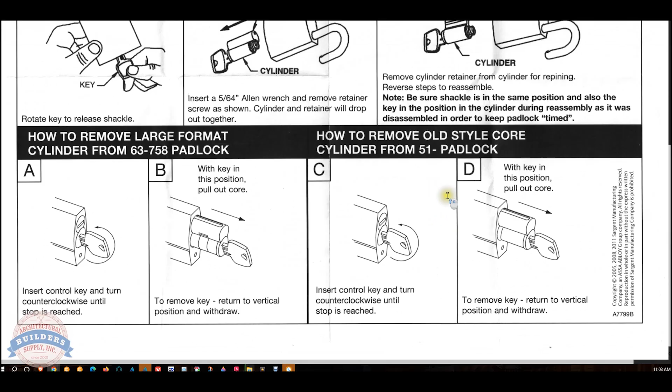The point of me saying all of this is in the back of the body of this lock shipped to me from Spain is a drilled and tapped hole for a screw that holds it in. So that's how you'll be able to service the cylinder, and at that point it'll come out. These obviously take the large format standard Sargent cores.

If you have an interchangeable core version, which obviously this is what we're dealing with, when you look at the 63 option, you'll use the control key to remove that. Fun fact, the Sargent interchangeable core cylinders, the control key rotates counterclockwise. Most rotate clockwise in my experience. Key pull position when you've got that rotated about 10 degrees counterclockwise.

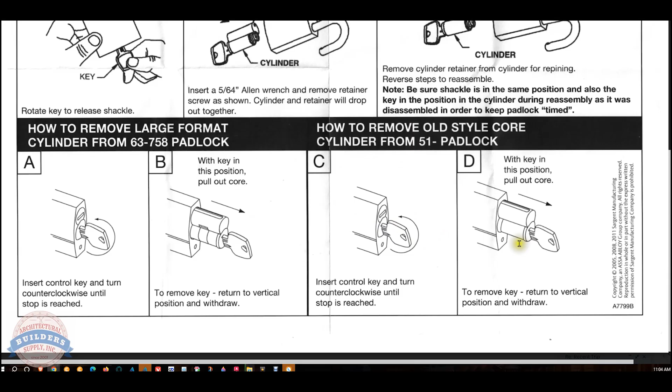The 51, how to remove old style? Yeah, sure. So I don't. Maybe in the 1980s is when they switched from the old to the new style Sargent cores. I would imagine there must be a mountain's worth of the old style still out there, given the fact that Sargent's been in business since the 19th century. I'm not sure what decade in the 19th century, but Civil War era, if not before. So that's the instructions. Let's take a look at the cut sheet.

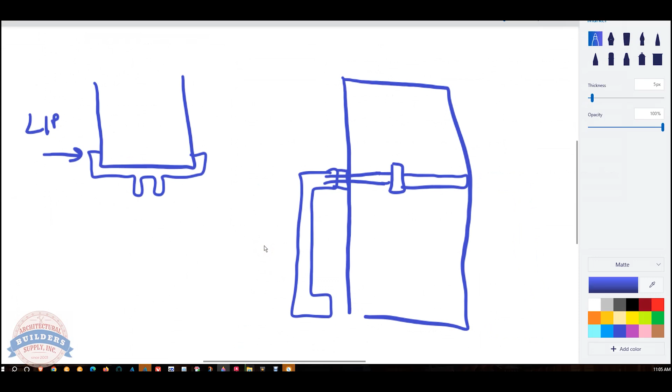I'm not a padlock expert, but I guess it would be true to say I know a little bit more about it. Here's the body, and here's the shackle. So literally in here is a ball bearing, and there's going to be a spring in here. And what happens is when you rotate the cylinder, I do believe there's a spring inside of there.

I think I'd have to pull up a parts drawing, but what happens is when you turn the key and rotate the cam on the back, it's probably not a spring. It's probably a piece of metal that deflects or something that moves out of the way, where the ball bearings literally come out of the way.

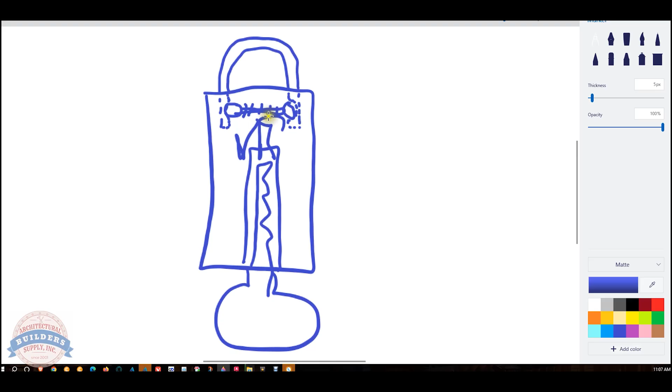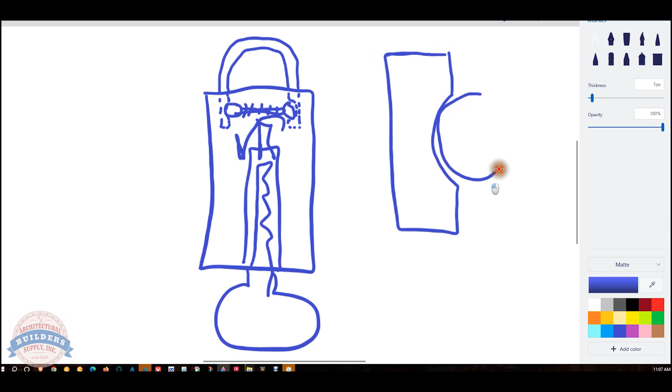Because the key, and that's the function of a key, it removes a blockage. So the blockage is what forces the ball bearings to reside in here. And when the key is turned, the ball bearings can scoot out of the way, allowing certainly a spring down here pushing the shackle up. Those ball bearings are able to get out of the way. That's a relatively crude but somewhat accurate example.

So this is, if you recall, this is an 858. There is a 758 on here. What's the difference? So a 758 is key retaining, key removable in locked position only. The 858 is non-key retaining. So what retaining and non-key retaining means: when the 758 padlock is in the unlocked condition, you cannot remove the key. Whereas with the 858, you can leave that padlock locked or unlocked.

Be mindful about what function actually best serves your needs. Do you never want to be able to leave the padlock unlocked? You might have a security gate at a perimeter of a military installation, and you would probably never want to leave that unintentionally unlocked. The point of the matter is, if you have key retaining, and you put the padlock back on, and you've got the key in your possession, you know it's locked. Meaning, if you've got the key in your possession, the only way you did that was to relock the padlock.

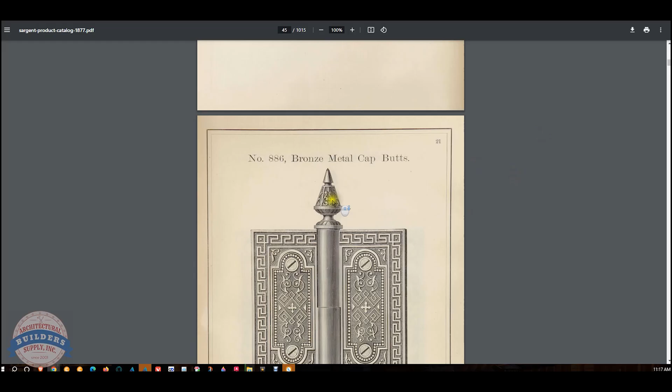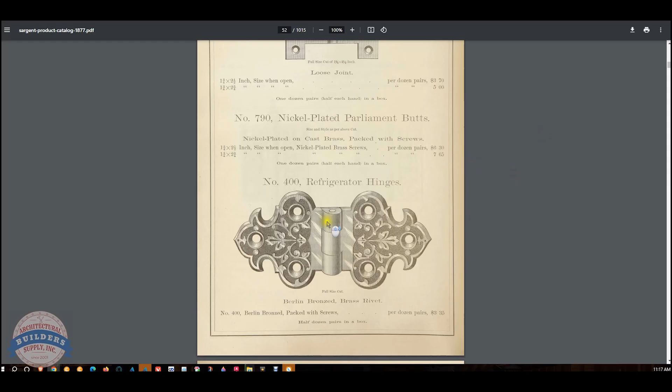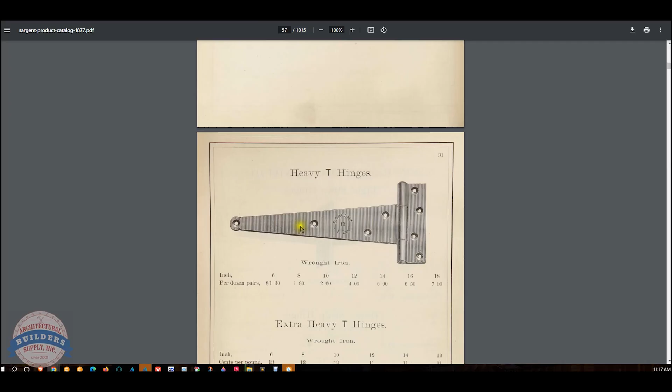When he set up shop in Connecticut, he needed highly skilled workers, if not craftsmen. And the reason that there is such a large, by percentage, population of Italian folks in that part of Connecticut is because Joseph Sargent, I believe it's Joseph, went to Italy to recruit workers and, I don't recall, it's published somewhere, but may have brought back 3 dozen Italian folks to work in the factory. And it's because of that it's said that there's such a large population of Italian folks. New Haven would be my guess is where it's approximately going to be.

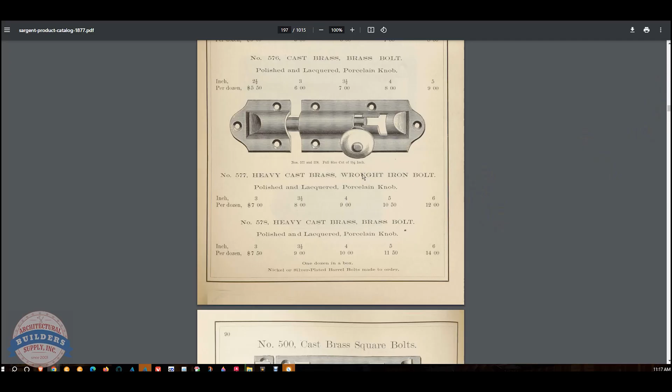Fun fact, pizza is from Italy. It's from Naples, Italy, I think in the 16th or 15th century. And it is said that the best pizza in the United States is in Connecticut.

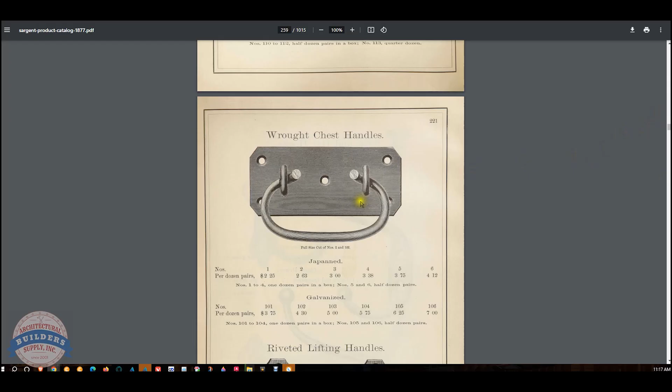Anyway, a neat catalog. Like I said, I don't know how close to the beginning of Sargent this is. My opinion, it's not too terribly far off. Okay, let's switch to the camera view and wrap up this video.